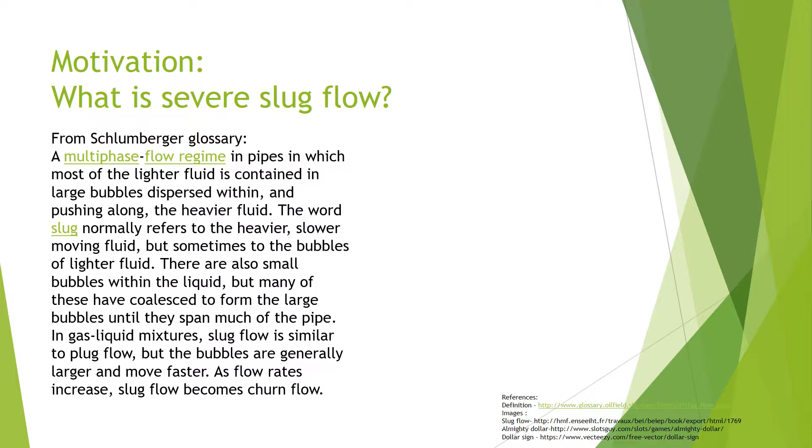So why do we care? Why do we care about severe slug flow? And who here likes Oreo cookies? Well, you should, because they're absolutely fantastic. And if you're like me, you're going to get the double stuffed Oreos, and you're going to pull them apart just like when you were a kid, and you're going to eat that cream-filled center first and then save those two chocolate crackers for later or eat them then.

Well, in the oil industry, that cream-filled center is analogous to our oil production. We love the oil production. It makes us a lot of money. We want to get more of that. That chocolate cracker part is going to be like our gas flow. Kind of plays the part of a tax return at the end of the year. You weren't banking on getting it, but I'll be dang, you're going to spend it. Am I right? So that's where that falls into play in this scenario. And this is with respect to wells that were in search of oil and not the lucrative gas wells.

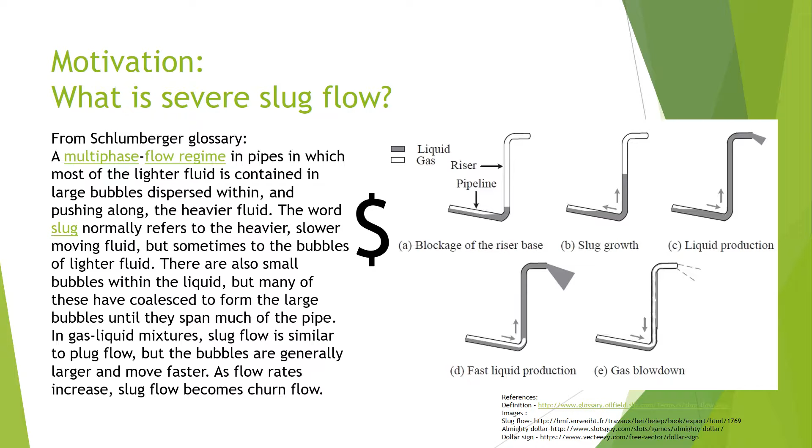We don't want our pipes to break because environmental cleanup leads to money, right? We don't want to go there. Now, last and one of the most important reasons is we don't want to get anybody injured or killed. Why? It leads to money, right? I mean, you don't want to get anybody injured or killed anyway, but even if you're a cold-hearted businessman, that leads into money, and you just don't.

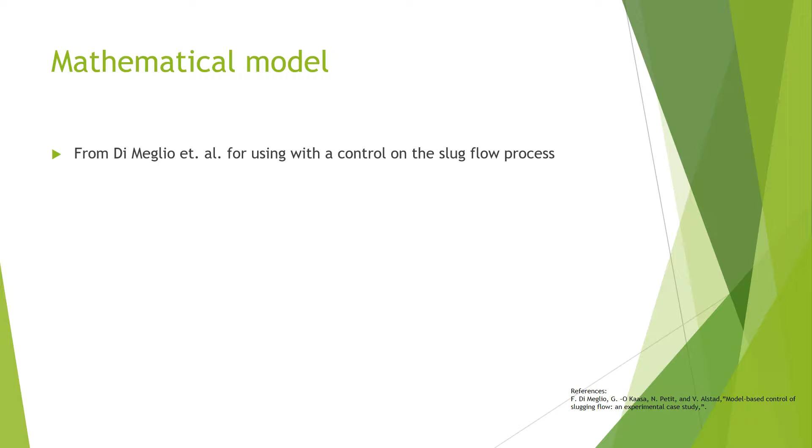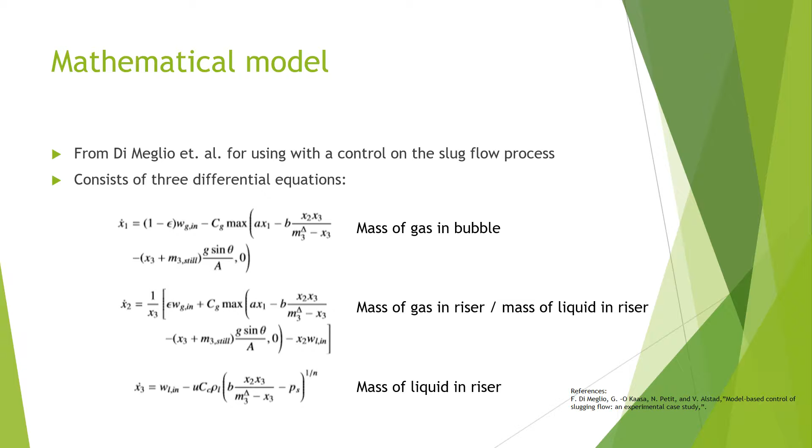So what is the mathematical model? It was developed by Di Meglio et al. It's for use with control in the slug flow process, and these and others like it are for that purpose. It consists of three differential equations, given to you there. X1 is the mass of gas in the bubble. X2 is mass of gas in the riser divided by mass of liquid in the riser. And X3 is the mass of liquid in the riser.

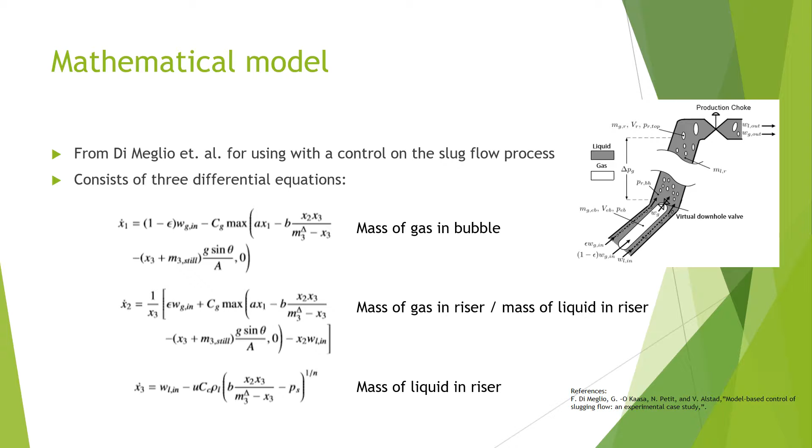So if you look at the diagram on the right, the main principle of this mathematical model is you set a virtual valve down at the riser base, positioned just past the bubble, and it's going to allow the gas to be pushed out, but it's not going to allow any reverse flow to come back through. And this proves vital because this is how it produces the slug flow. When the pressure in that bubble gets larger than the pressure at the riser base, it's going to let go of the gas all at once, and then you have your corresponding slug.

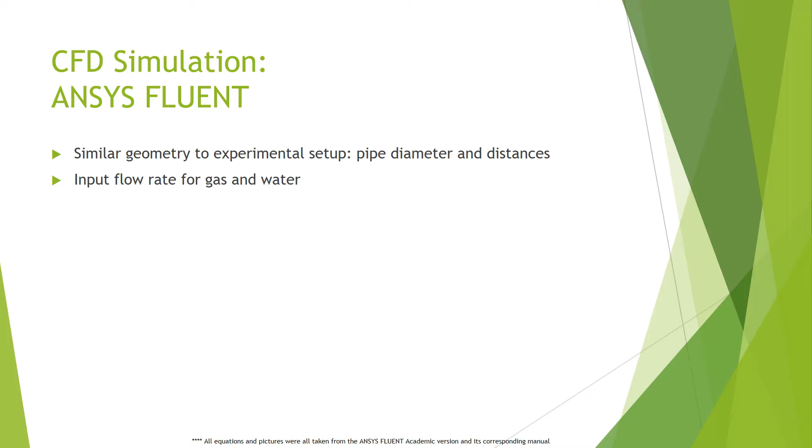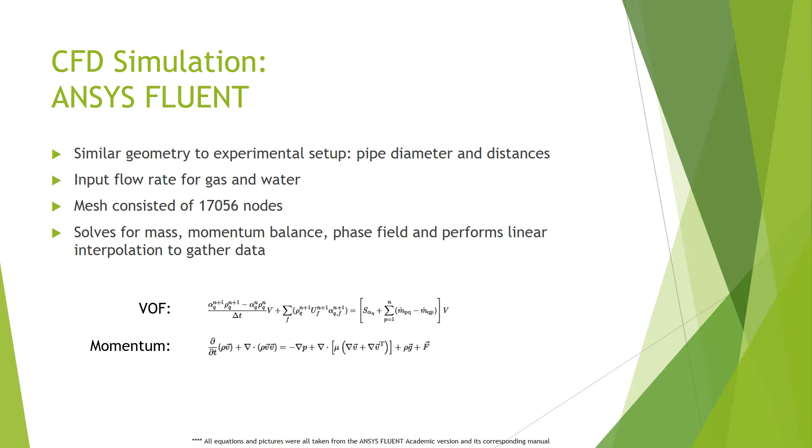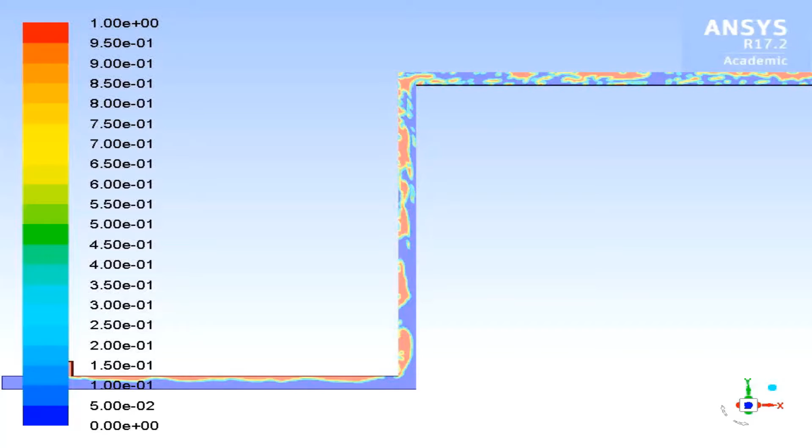What did it look like? Well, there it is. If you look at the riser portion, you can see you have the slug flow and the gas bubbles coming up. But if you take a look at the bottom on the horizontal portion, you can see a separation of the gas as it's moving along. The red corresponds to all gas, and the blue, pretty much a no-brainer, corresponds to all liquid.